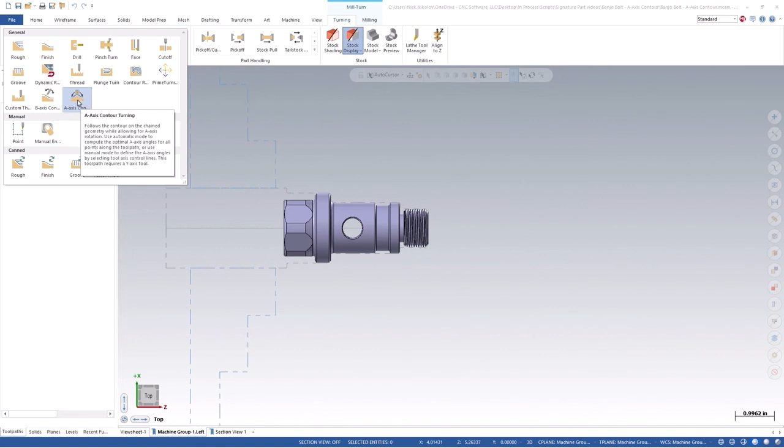If you're still with me, this is the video for you. So let's take a deep dive into the A-axis toolpath and how we can set one up. Now we're going to start by clicking on the A-axis turning toolpath itself. Solid chaining manager appears, and we're going to chain the OD of the part up to the larger OD here.

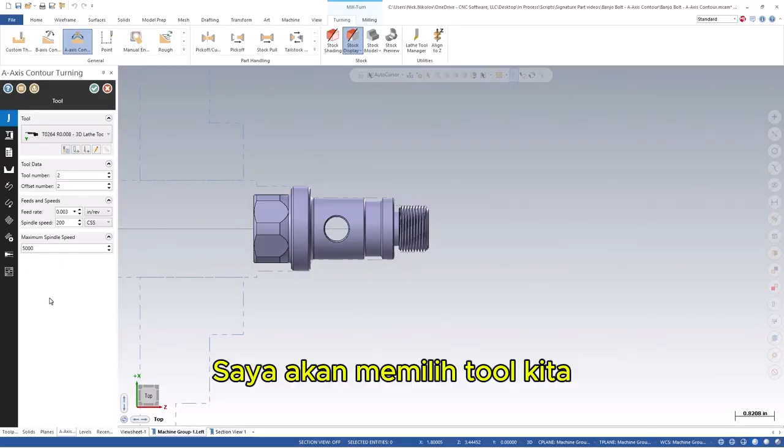Now we have a similar panel interface to the B-axis turning toolpath. I'll probably reference the B-axis turning toolpath a little bit throughout this because they're so similar. We're going to select our tool. Now here we can select our tool number and our feed rate as far as our maximum spindle speed for constant surface speed.

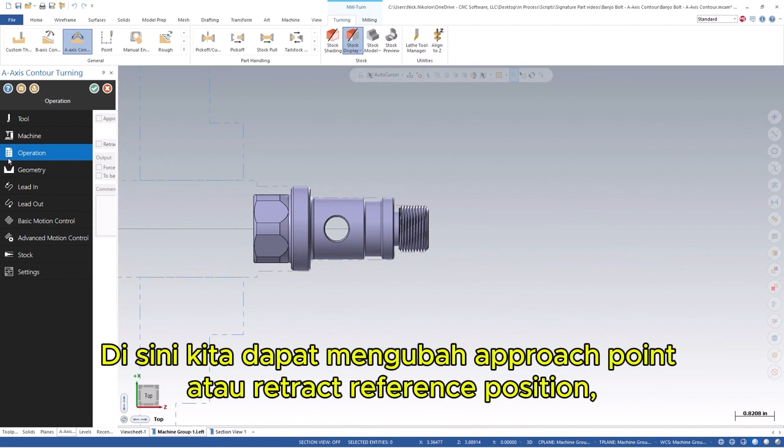Now the next tab down, we have our planes manager. The nice thing about A-axis turning toolpaths as well as Y-axis turning toolpaths in general is that Mastercam makes the plane for us. So we don't have to worry about anything here. Now next we have our operation tab. Here we can change an approach point or a retract reference position, as well as force a tool change or input any comments that we have.

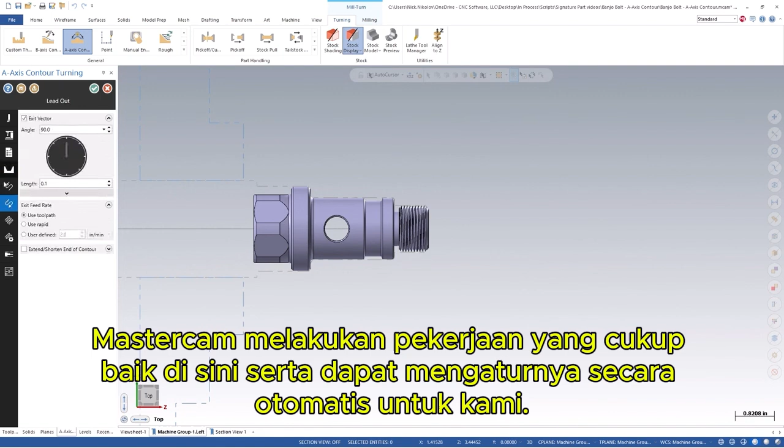Our next tab is our geometries page. Here we can select our chain if we want to reselect something, or we can change our comp direction or stock to leave. Followed by lead in and lead out directions. Mastercam does a pretty good job here, as well as being able to set this automatically for us. So most of the time we don't have to change that, only when we're fine tuning the toolpath.

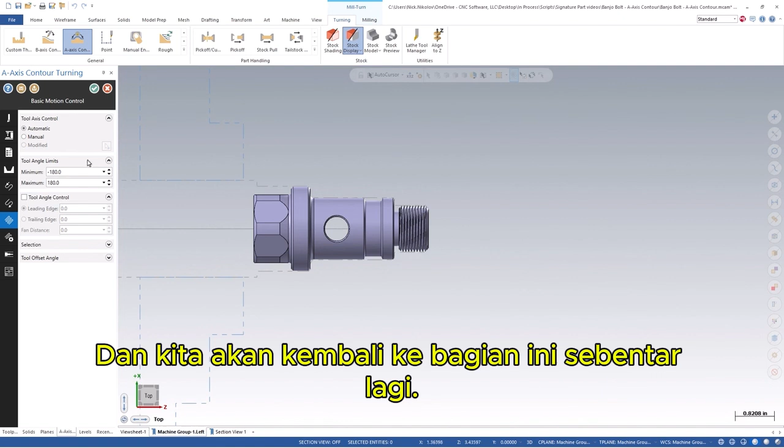The next tab is our basic motion control. This is probably the most important page in the A-axis turning toolpath. Now we're going to set it to automatic, and then we're going to leave our tool angle limits how they are. And we'll get back into this in a second. Let's go ahead and regenerate the toolpath just to see what we're working with.

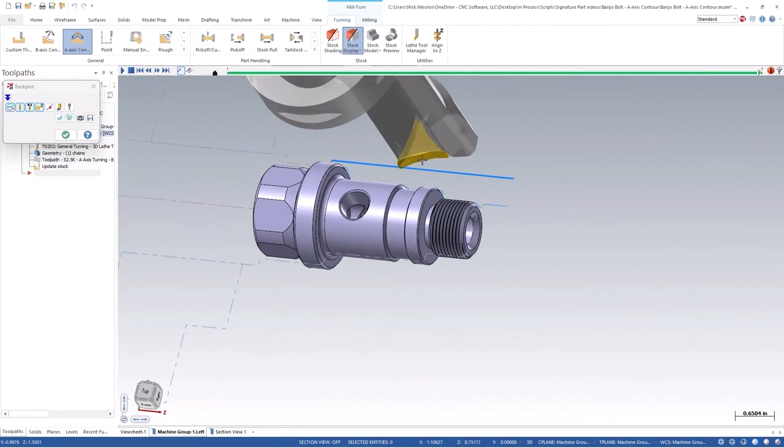Now we're going to take a look and backplot the toolpath. And we can see that the tool indexes throughout the cut. Now here I have that same Y-axis turning tool. When it's mounted in the B-axis head, you can imagine it looks something like this. And as we're cutting, the tool will actually index and rotate throughout the cut. So that's what we're seeing here in Mastercam.

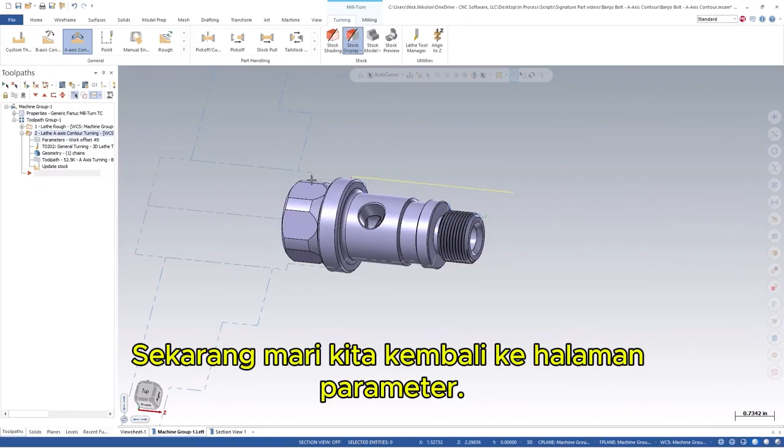Now let's go back into the parameters page. Our tool angle limits. Just like in B-axis contour toolpath, we have the same tool angle limits, but we're not limited based on the B-axis travel. We can actually go anywhere from positive 180 to minus 180 degrees.

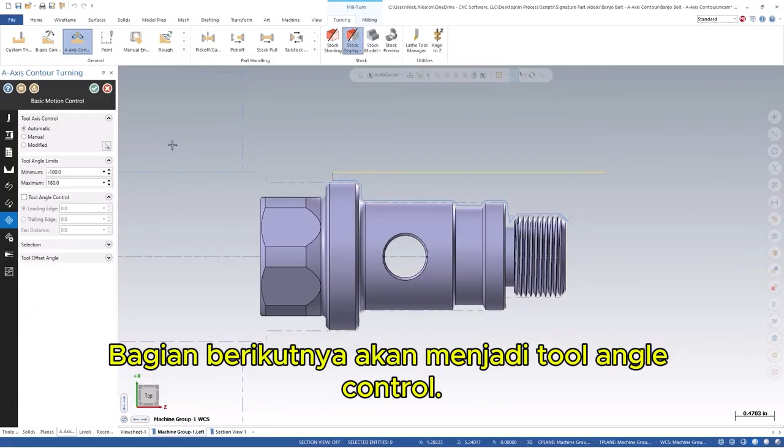The next section down is going to be tool angle control. This is where we're going to set a leading or trailing angle based on our insert itself. So let's go ahead and set a trailing edge angle of 45 degrees. Our fan distance is going to set a tolerance on how much it's going to roll over an edge of a corner. Let's go ahead and backplot the toolpath.

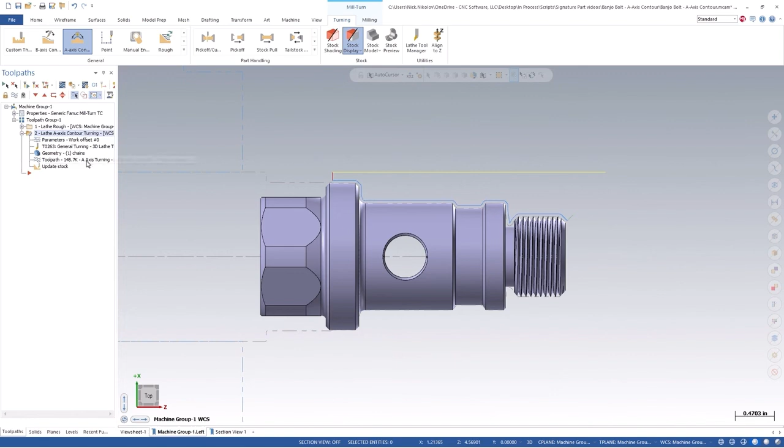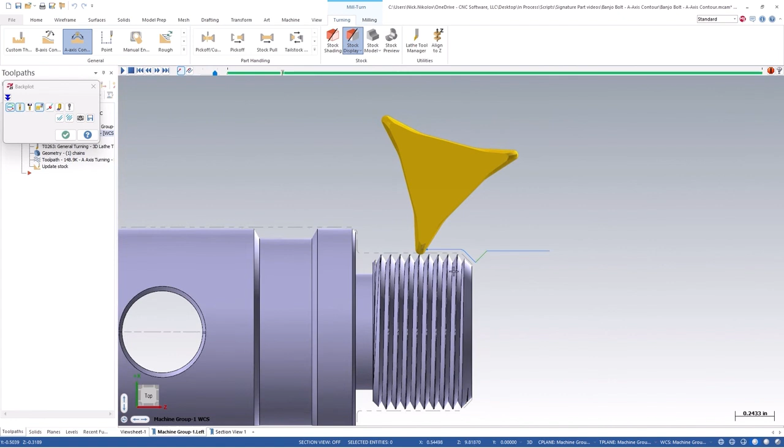Now, as I step through the toolpath, you can get a pretty good idea of what that trailing edge angle is trying to do. I'll shut off the holder, make this a little bit easier to see. Now we're keeping a constant angle on the trailing edge based on our geometry. This works pretty well on flat surfaces, but you can see if we step through to an angled surface, it's going to keep being 45 to the angle of the surface that we're on.

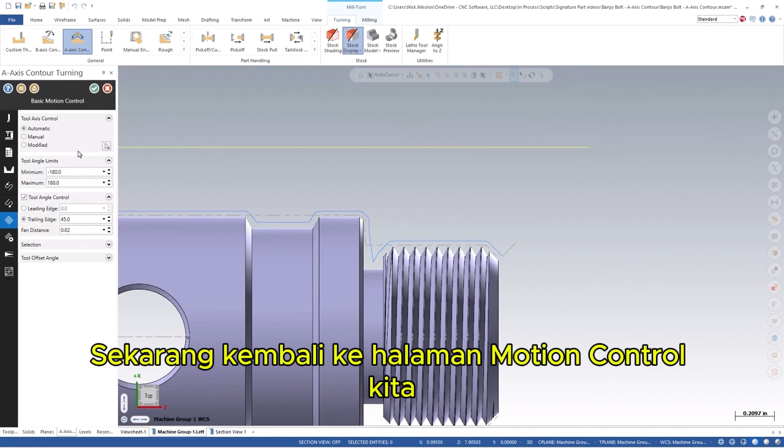Now, the toolpath is smart enough to not gouge, so it's going to make sure that it's not going to hit the part, but this still might not be ideal, but it's a good example showing exactly what that operation does. Now back in our motion control page, we also have a tool offset angle option and a selection option. We're going to leave those blank and we're going to move on to the next page.

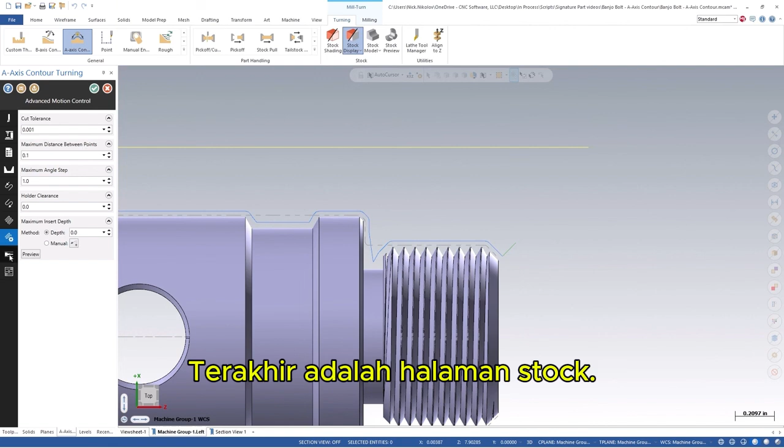Next, we have advanced motion control. This is where we're going to set things like cut tolerances, maximum angle steps, as well as maximum insert depth, just like in the B-axis turning toolpath. Last is the stock page. This is where we're going to be able to adjust our stock to make sure that our lead in and lead out motion doesn't gouge into any remaining material.

Mastercam 2025's introduction of both the Y and A axis toolpaths bring our turning capabilities to the next level.